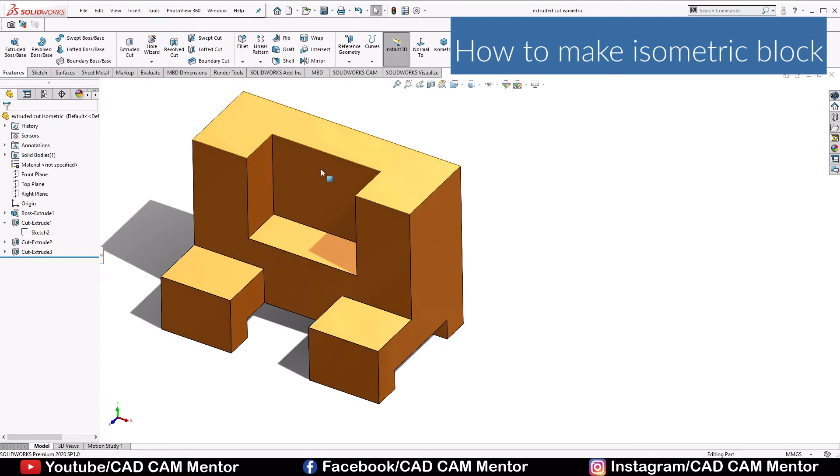Hello everyone, in today's tutorial we will learn how to make this isometric block by using extruded base and extruded cut. Along with that we will see how to select the material for this block and how to apply and edit the color. So let's get started.

When we open SolidWorks, select new, select part, click OK. Now first of all change this IPS to millimeter gram seconds.

So these are the dimensions for our block. Length is 200 mm, height is 150 mm and the width is 126 mm. So we'll make this simple block first by using extruded base.

First of all select this top plane and select sketch. Now we'll select center rectangle and we'll draw one rectangle here. Click OK. Now we'll give dimensions to this rectangle.

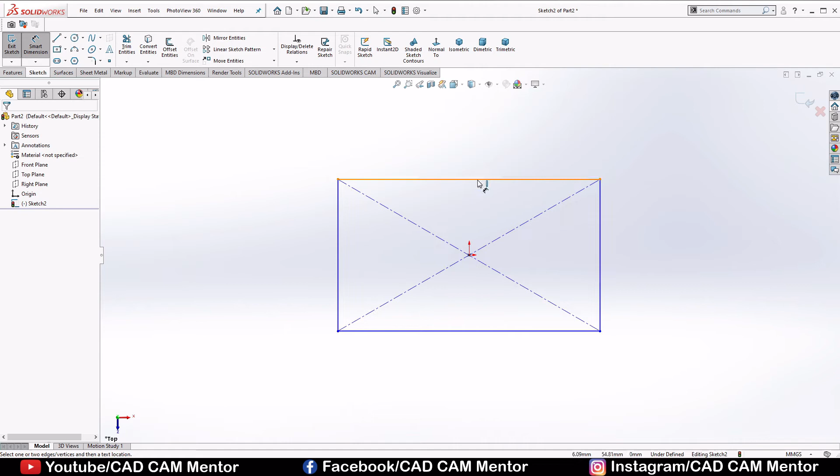You can select smart dimension from here as well, or use a short key: hold your right mouse key and drag upward to select smart dimension. Now select this line, our length was 200 mm, click OK. Again select this line, the width was 126, click OK.

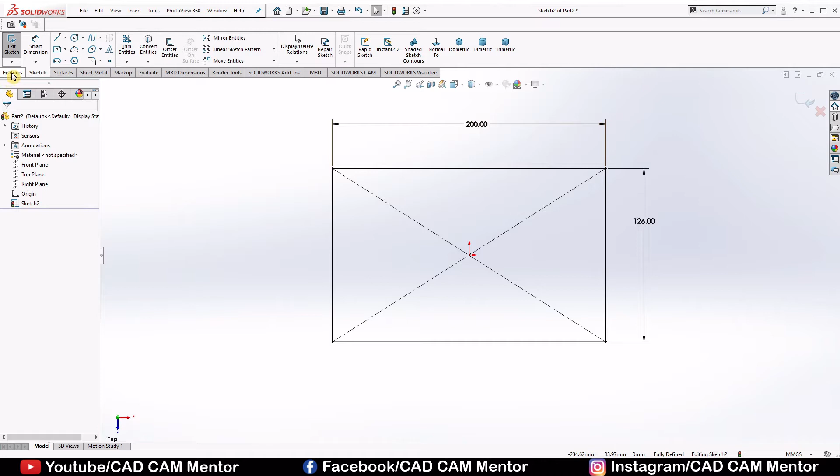So our sketch is fully defined. Now go to the features and select extrude boss base. Here we will put our height - our height was 150 mm. And click OK.

So this is our simple isometric block. Now we'll cut this two rectangular portion first. This length is 24 mm, this is also 24 mm and the height is 18, and the overall length is 126 mm.

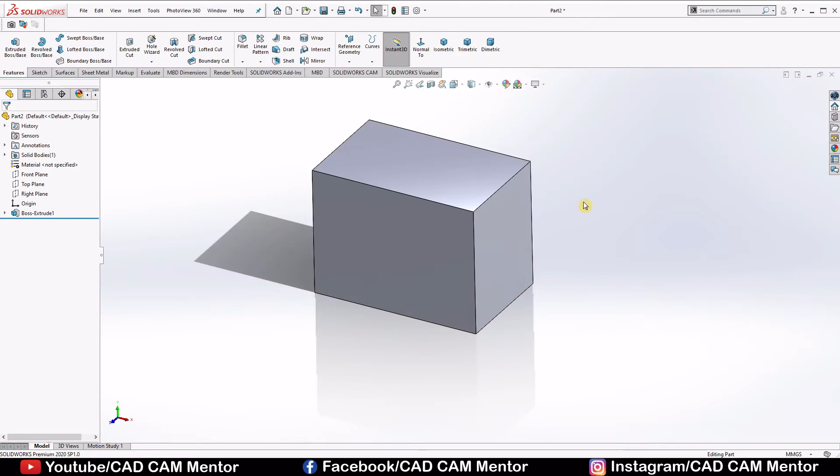Right click on this surface and select sketch, select normal to. Here select corner rectangle. We'll draw one rectangle here and one here.

Now we'll assign dimension. Height is 18 mm. And this length was 126 minus 24 minus 24.

Now select this origin and hold the control key. Select this line and select here midpoint relation. Click OK.

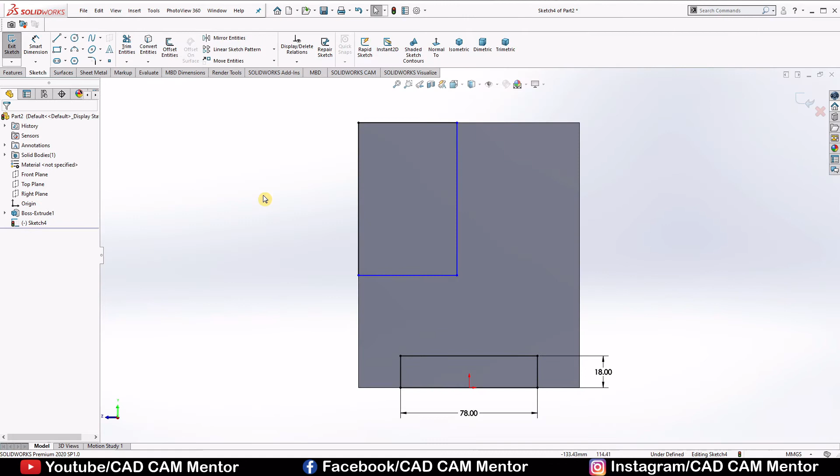Now we have to find this height. Overall height is 150 mm and this height is 50, so this is 100. And here this length is 78 and overall length is 126, so this is around 50 mm. So this length was 50 mm and the height was 100 mm.

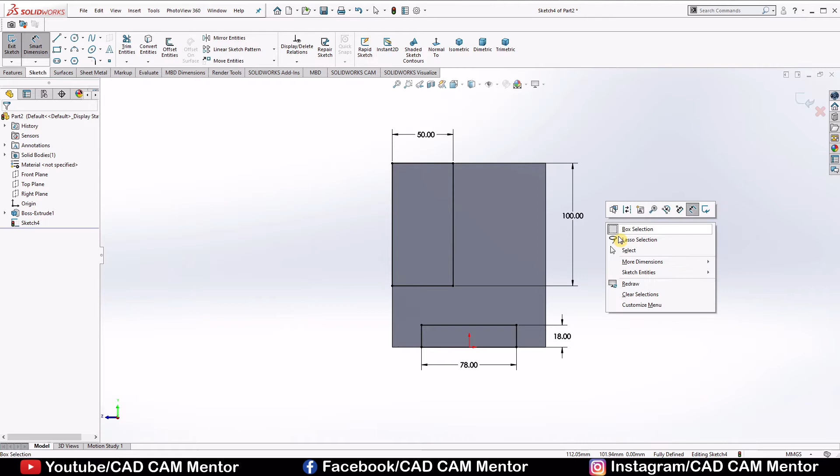Now again go to the features, select extrude cut. Select here through all and click OK.

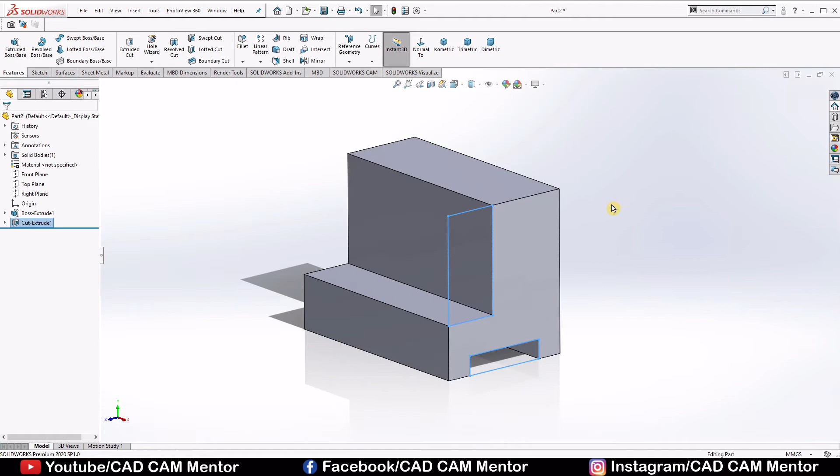Now we'll cut this portion. Height is 76, overall length is 200 and this is 50, this is 50, so this will be 100, and this length is 38. So right click on the top surface, select sketch and select normal to.

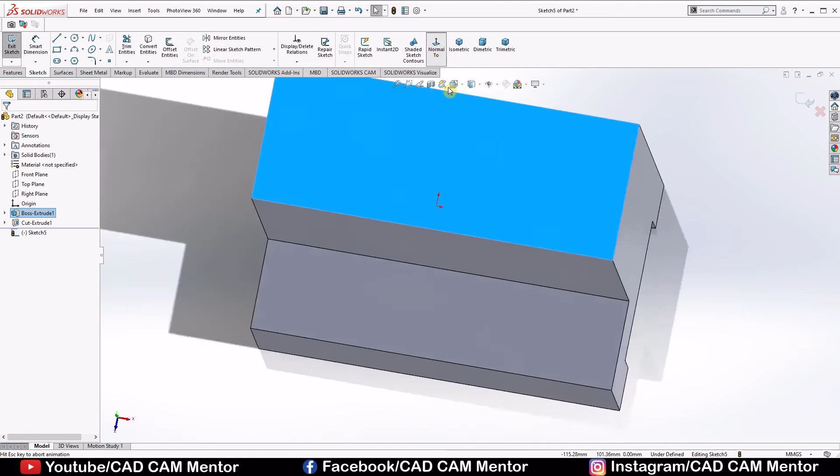Again go to the rectangle, select corner rectangle. Draw one rectangle here and click OK. Again select smart dimension, select this line and give length 38.

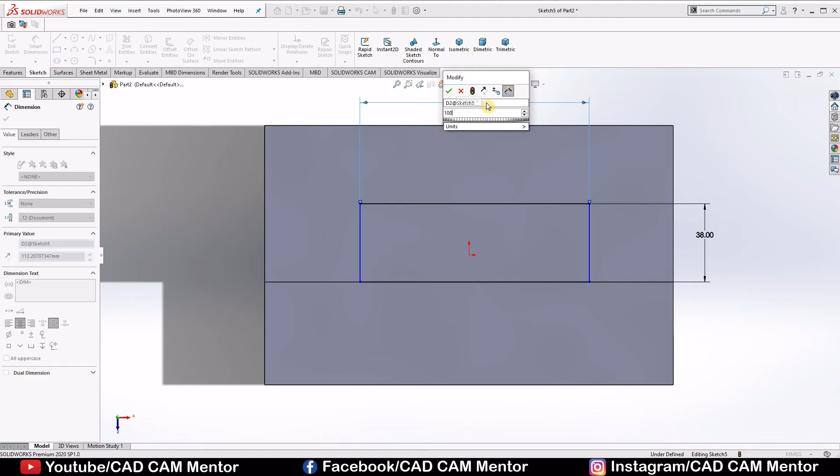This length was 100 mm, so we'll put 100. Again, sketch is not fully defined. So select this line and this line, give dimension 50 mm. Now the sketch is fully defined.

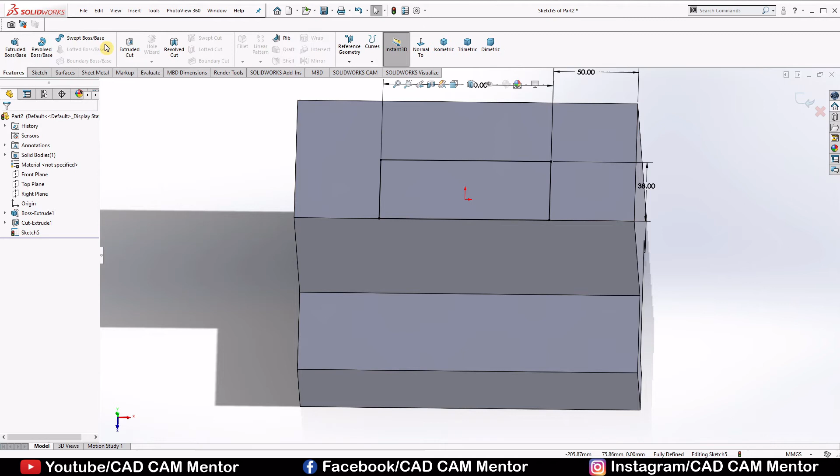Go to the feature, select extrude cut. Now we'll put here length 76 and click OK.

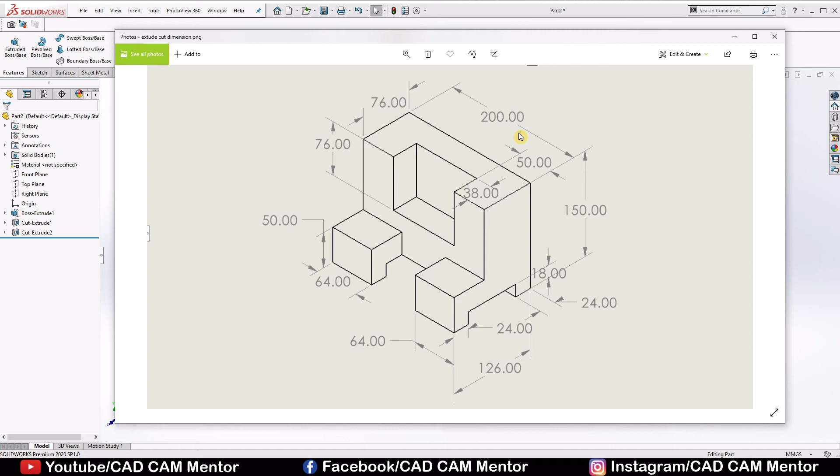Now we'll cut this final portion. This length is 64, this is also 64, and overall length is 200. So right click on this surface, select sketch, select normal to.

Again select here rectangle, draw one rectangle here, click OK. Select this line and give dimension 200 minus 64 minus 64.

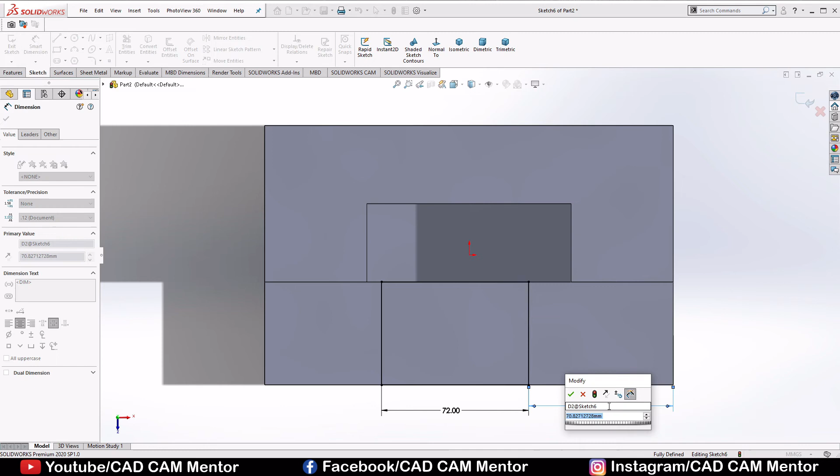Still sketch is not fully defined. Then select this line and this edge, and give distance 64. Now the sketch is fully defined.

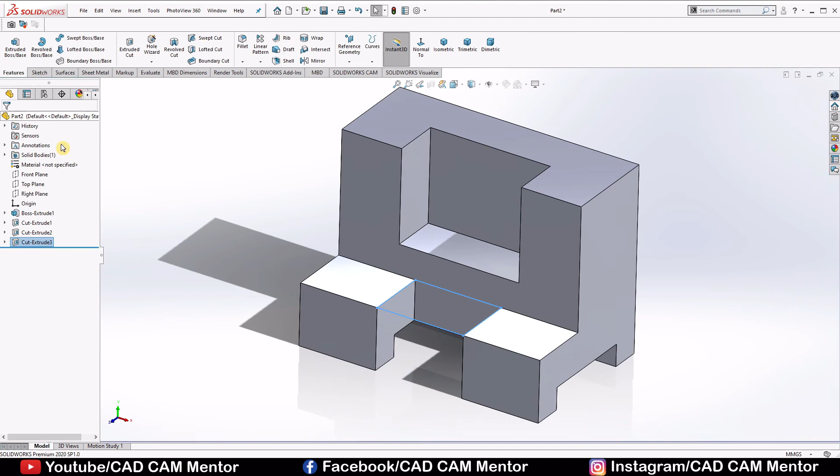Go to the features, select extrude cut. Select here through all and click OK. So this is our isometric block.

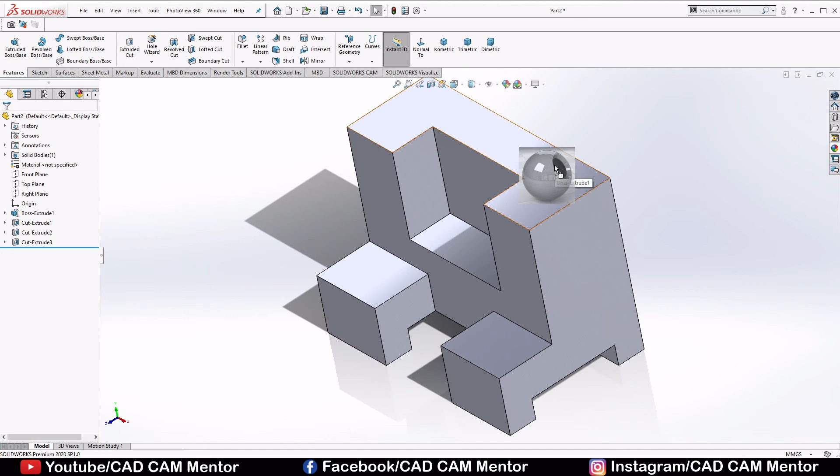Now we'll see how to select the material for this block. Go to the appearance, select metal, select steel. We have so many options here. For now we select this polished steel, drag this polished steel and drop on the isometric block and select body.

To change the background, select the small arrow beside apply scene and select any background you want. For now we select this plain white.

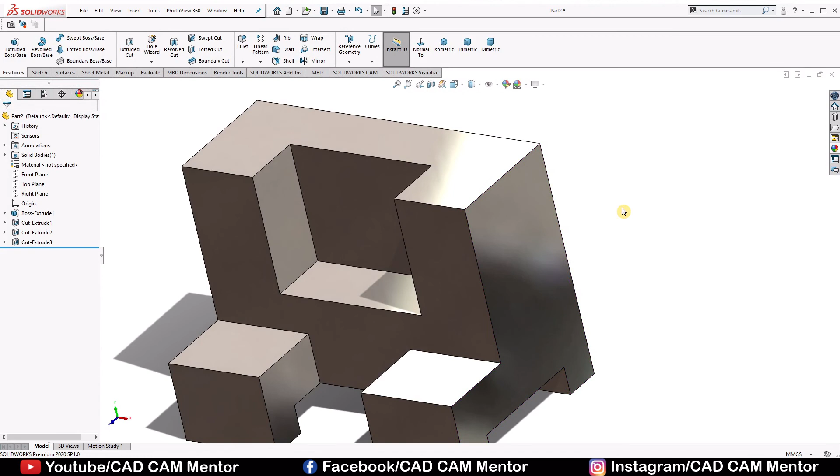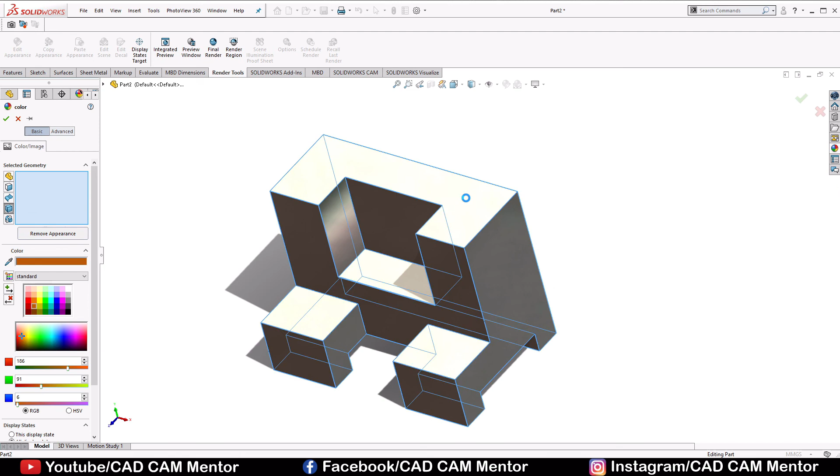Now we'll see how to apply color to this block. Select edit appearance. Here select any color you want, and here select bodies and select here body. Click OK.

So this is our isometric block. We have only used extruded base and extruded cut to make this block.